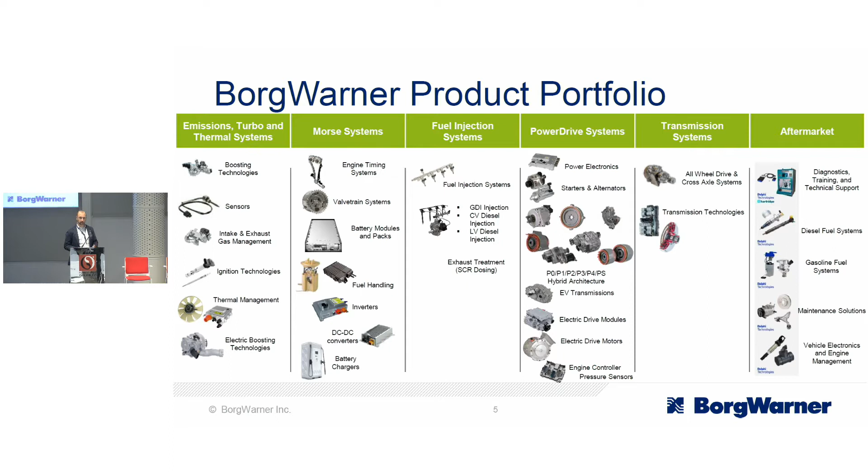This is an overview of what we are doing. Each division, as I said, is focused on a specific type of product. We belong to Morse Systems. In Morse Systems, we are mainly involved in engine timing systems, valve train, battery packs, fuel handling, inverters, DC-DC, and battery chargers. Let me give you a quick overview of my division.

We have roughly 7,000 employees, same philosophy as the BorgWarner Group, so equally divided across Europe, Asia, and North America. We have several locations, tech centers, sales, and production centers. Each of them is specifically involved in designing, developing and producing a specific product.

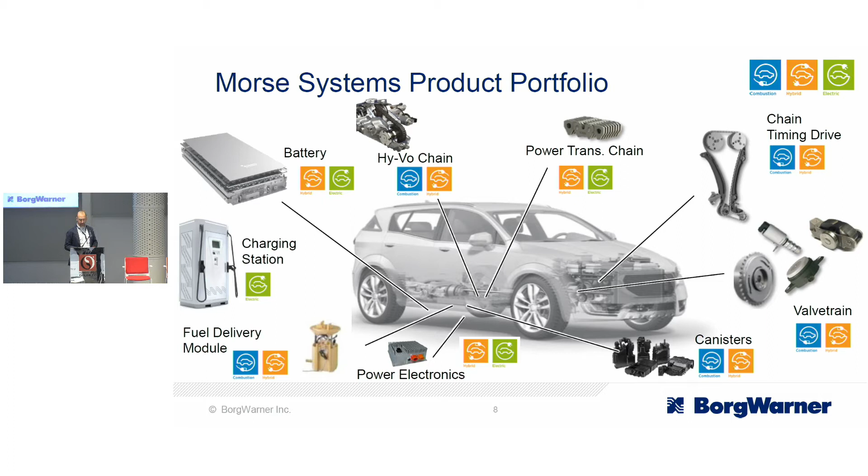This is our portfolio. As I said, and as you can see, there is the clear mission to convert more and more of our offering from a pure combustion engine market toward hybrids, and finally to the electric market. In particular, we have lately included battery packs in our portfolio through the acquisition of a big company in Germany, and we are developing our own charging stations and power electronics.

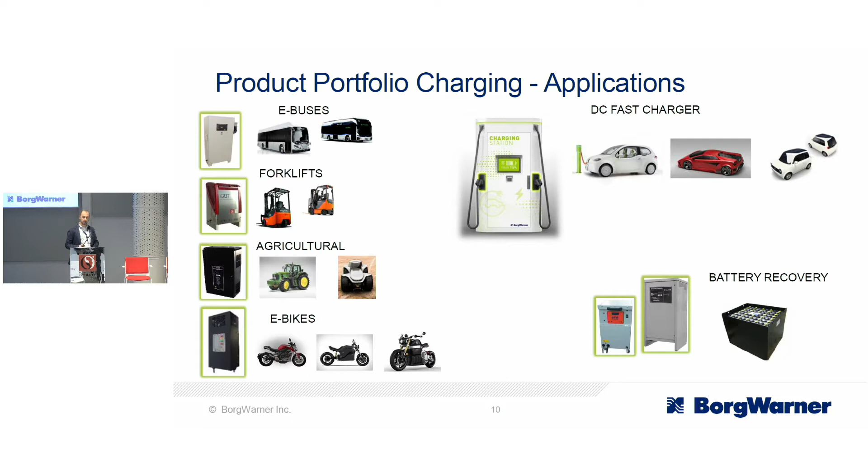Here is the overview of the plant where I'm currently sitting, that is in Lugo. We are mainly focused on producing battery chargers for every kind of application: off-highway, on-highway, low voltage market, high voltage market, and automotive. We have strong experience in battery charging because this plant was founded more than 40 years ago and started developing its first application for charging lead-acid batteries.

And we started in 2005 to develop our first application for charging lithium battery packs, following the requirements of our customers, who are asking more and more for innovative solutions. And that's why 10 years later, we developed our first battery charger specifically designed for high voltage battery packs.

Last but not least, our latest product is the automotive fast charger that we developed last year, and we have started to produce it, this one. And this is our first product that is aimed to enter the market. It can be sold almost everywhere because of its characteristics.

It inherits all the experience that we have on the battery charger side. So it's robust, it's reliable, but at the same time, it's capable of being installed in public areas, so it enables a complete portfolio of market applications. But this is the first sample of this product family. We would like to develop more and more of this type of solution, and I will explain later.

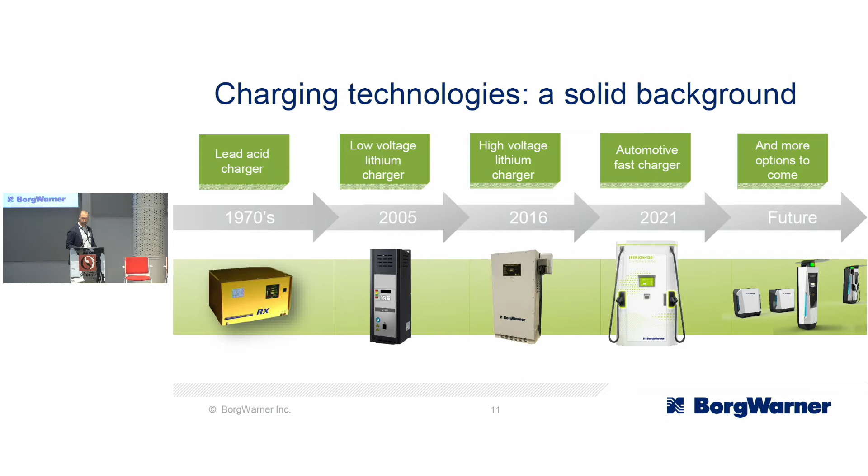Quick overview about the product. The product is a 120 kilowatt charging station that is capable of charging two vehicles in parallel at 60 kilowatts. This type of solution is interesting because it has been designed robust and reliable. It's able to charge almost any kind of vehicle application. So I'm thinking of the automotive market, passenger cars, commercial vehicles, but also all the vehicles that need to be charged, and we see more and more.

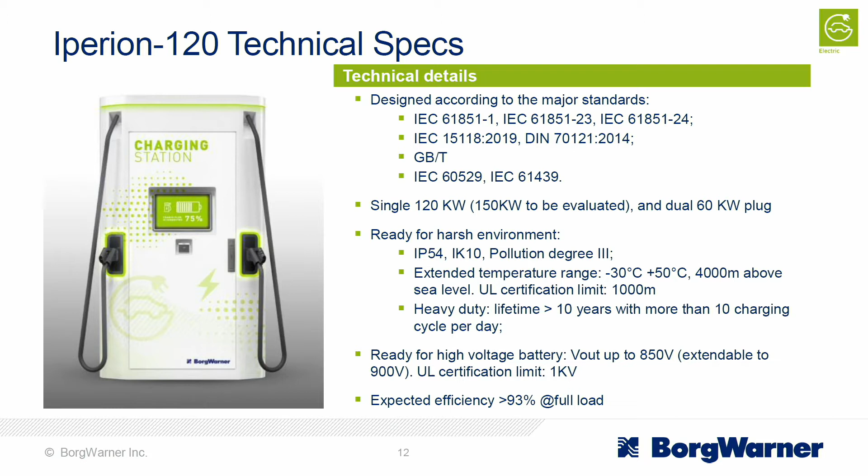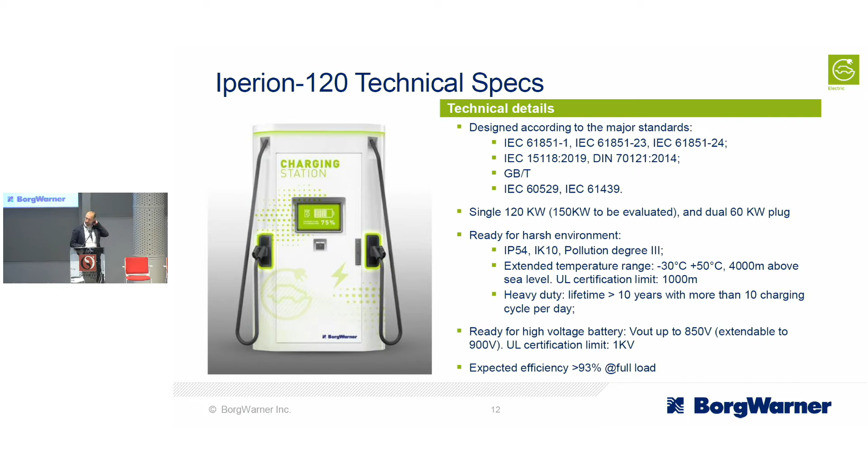I know that you are cooperating with a battery company who has developed specific custom applications for the industrial market, for example. And this type of solution can easily fit that market also. It's IP54, IK10, pollution degree 3. It's able to charge from -30 to +50, up to 4,000 meters altitude. So actually it can cover every kind of application and location.

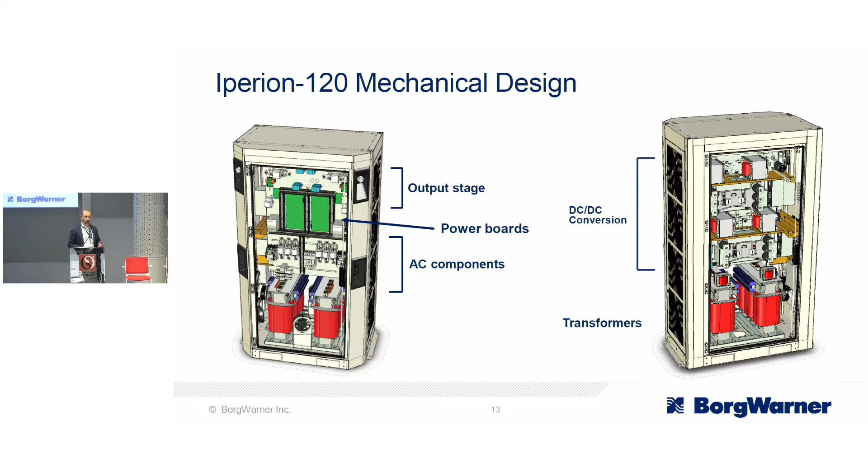Here you can see our mechanical design. As you can notice, the internal components and the internal design of our product clearly show its nature. It has been derived from an industrial concept in order to be robust and reliable. And above all, the entire bill of material and the entire design is owned by us, so it's completely built in-house. This obviously requires specific development and capabilities, and that's why we have shaped our plant to be able to embrace both the industrial market and the automotive market.

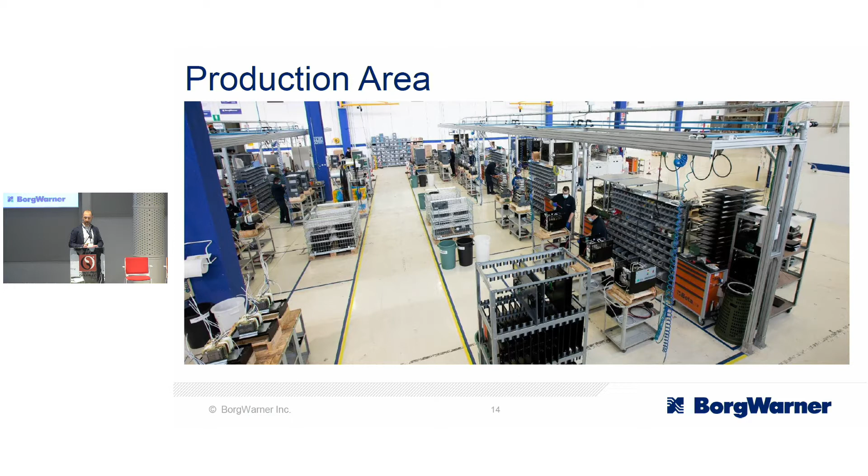As you can see, a quick picture of our production area. In this area, we are able to make the industrial market coexist, with a production of roughly 25,000 chargers per year, with the production of this type of application at a rate up to 1,000 chargers per year. So in total, we are able to embrace a big variety of different types of application. As I said, we completely own the design and the IP of this product. That's why we have our tech center, our development center in-house, which is, as you can see, very near the production area.

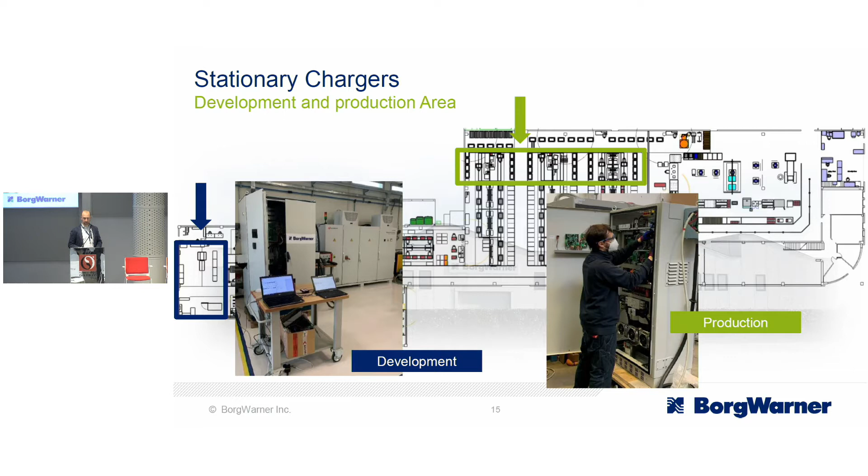And this is what we produce from the battery charger point of view. In parallel, we have a wide product range of inverters that are able to cover the low voltage market from 24 up to 96 volts, but also the high voltage market. So in this way, and thanks also to our battery pack production capability, we are able to offer a turnkey solution to our customers who are looking to integrate e-products and convert their solutions to e-mobility.

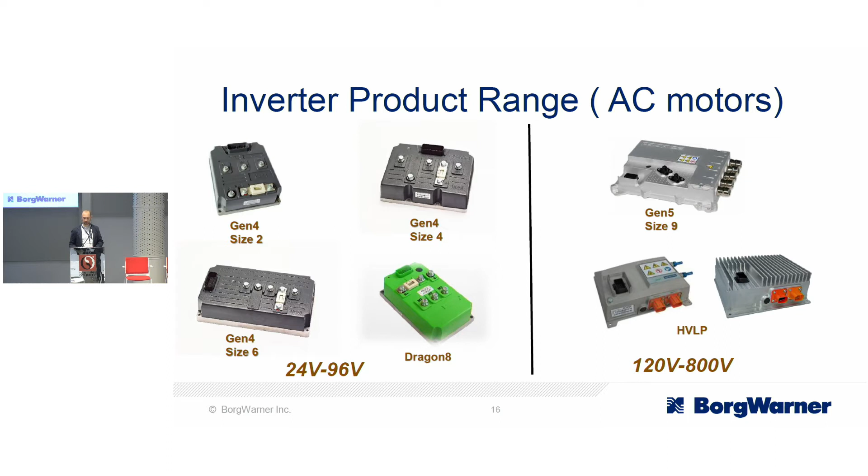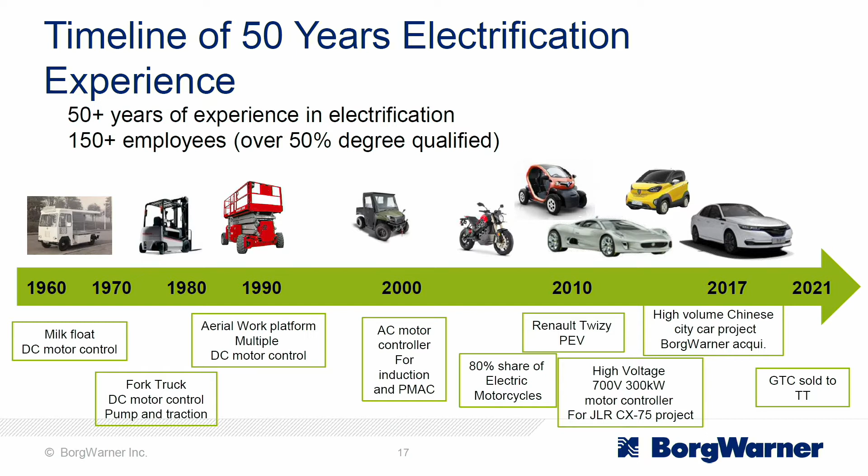The inverter product line roughly follows our experience in battery charging. We have been on the market with the Sevcon brand since 1960 with our first application, and then, following the requests of our customers, we have developed more and more solutions to support their needs. So starting from DC motor control, then followed in 2000 by our first AC motor controller with PMAC, and then more and more applications towards the automotive market with high voltage applications, like the latest one.

And again, we follow the same philosophy of completely owning the IP, the experience and the know-how to develop solutions in-house. We have our development center in the plant, which permits us to be near the customer and develop their custom installations, their custom products, in order to fulfill their needs.

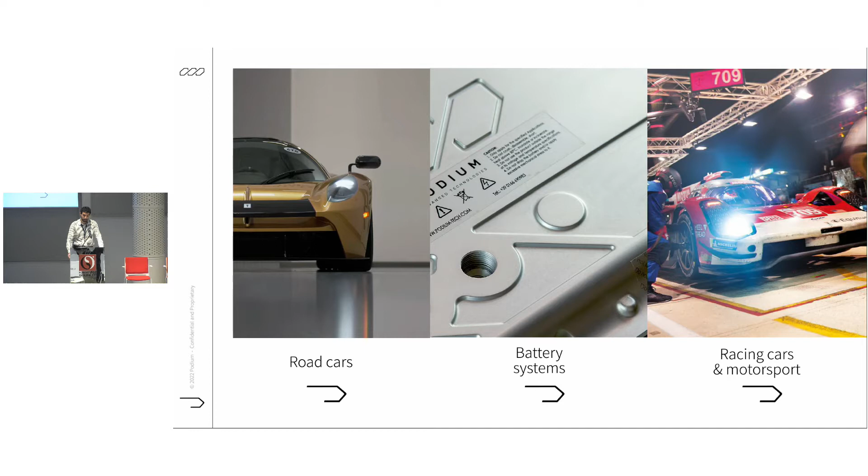So the company is divided into 3 different business units. One, road cars, automotive, for design and assembly of bespoke projects. Battery systems, for the design, according to the customer requirements, of a battery system, normally a high-performance battery system with all the electronics attached to that. And then we have also motorsport and racing cars.

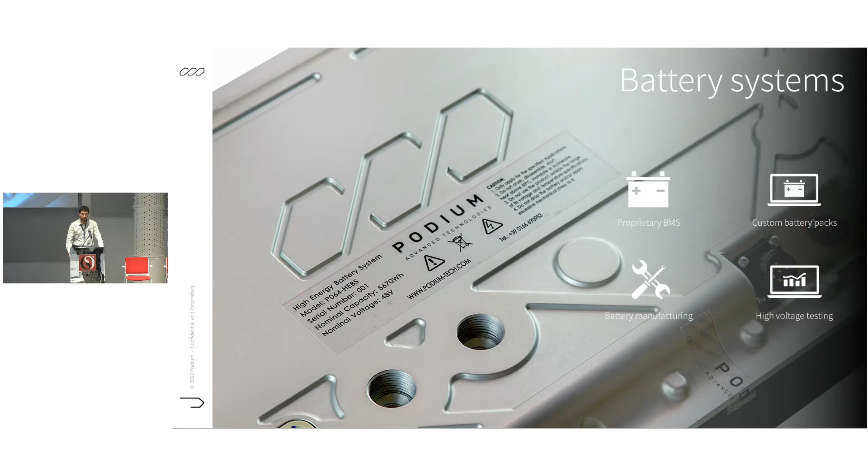Talking about the battery division, Podium has a proprietary BMS system developed in-house, with software that is completely integrated in-house, and has the possibility to develop custom battery packs, do testing, and battery manufacturing. Today we want just to bring you a little bit more insight on the steps between the requirement and the product, and how from the product we get to the selection of the process, such as laser, that is a key technology for joining.

So everything starts with testing the cells, characterizing the cells in terms of performance and in terms of the thermal characteristics they have when they work. Then all this data is used to develop the battery system in terms of module and pack, and during the design phase, the design department strictly collaborates with manufacturing engineering to understand what's the best technology for adhesive or for joining, for example, busbar to cell.

Because, as we have seen in the last 2 days, there is a strong interconnection between the product and the process. And both of them need to match each other and need to be developed together.

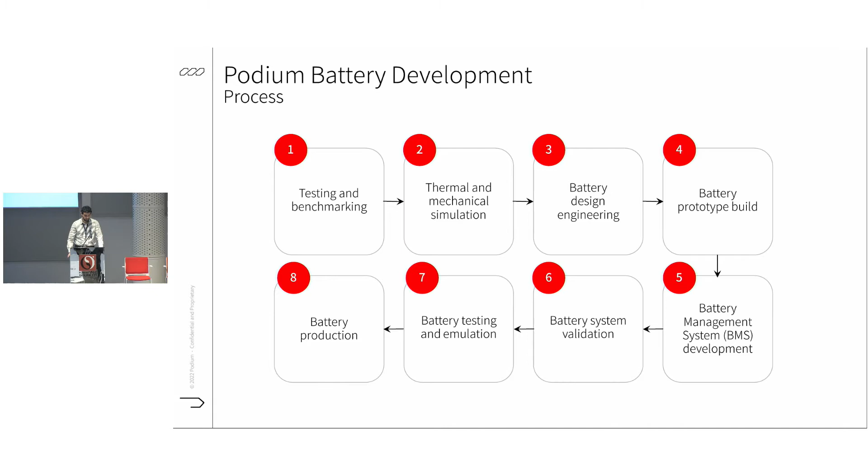Once the battery is designed, we have the first build of prototypes, and in conjunction the development of the battery management system and all the software integrated. Then the system is validated, tested, emulated, depending on the characteristics of the application. Different tests are applied, and then once the product is validated, battery production can start.

So we talked earlier on about product and process and how the two items go together. So in-house we have the possibility to do wire bonding, and it's a technology that can give some advantages, such as it doesn't require any special tooling. It gives the possibility to 100% check the quality of the connection,

but on the other side brings some disadvantages, such as thermal characteristics, heat that it generates in charge and in discharge, and different other challenges. So laser welding, on the other side, can provide probably a wider surface of connection, can accept charge and discharge cycles probably more aggressive than wire bonding, but brings some complexity in terms of process, development of the process, and tooling.

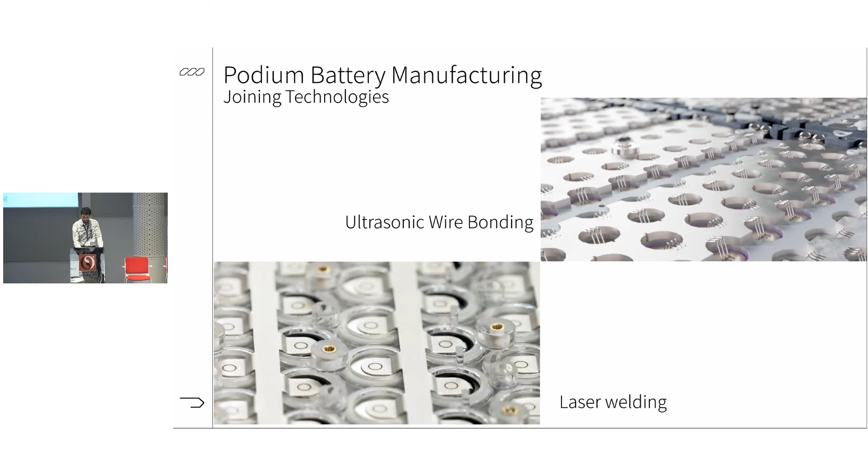So just going through one of the wire bonding applications, we recently introduced one in a very unique motorsport application with a bespoke module, with cylindrical cells, and as you can see, there is no requirement for tooling, development of tooling, and it's less sensitive to height and manufacturing tolerances. So we have bus bar material in aluminum, cell material in steel and wire material in aluminum.

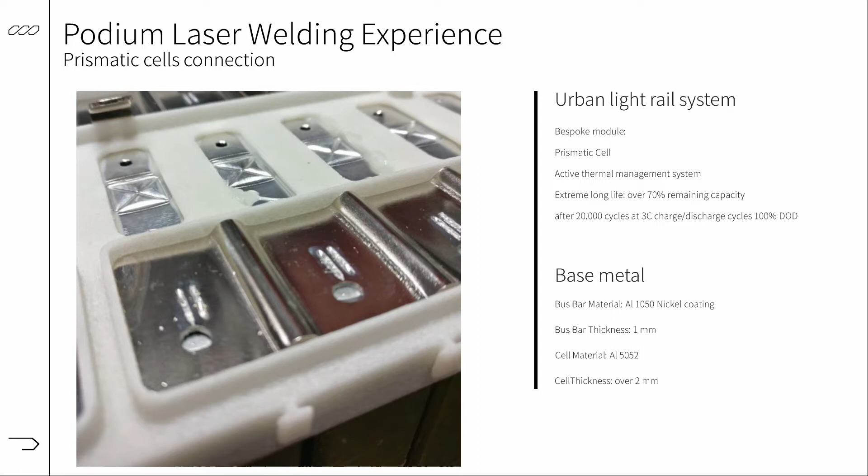When it comes to our experience in laser welding, we have had a couple of experiences in the last few years. One of them is with prismatic cells for an urban light rail system. This application has been quite challenging, mainly because the requirements of the customer had a lot of safety attached that had to be taken care of during the development of the product and the development of the process. So a lot of tests have been done,

and as we said, we had quite a strict joint specification, welding specification. So in order to test the parameters, the welding development, a lot of tests have been done in order to sense check the temperature limits, verify the welding penetration, make sure that the electrical resistance targets were within the limit, and also the mechanical requirements.

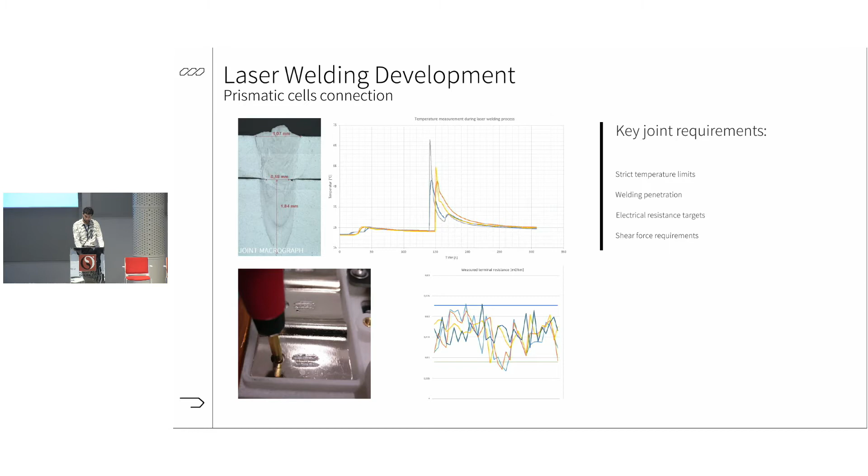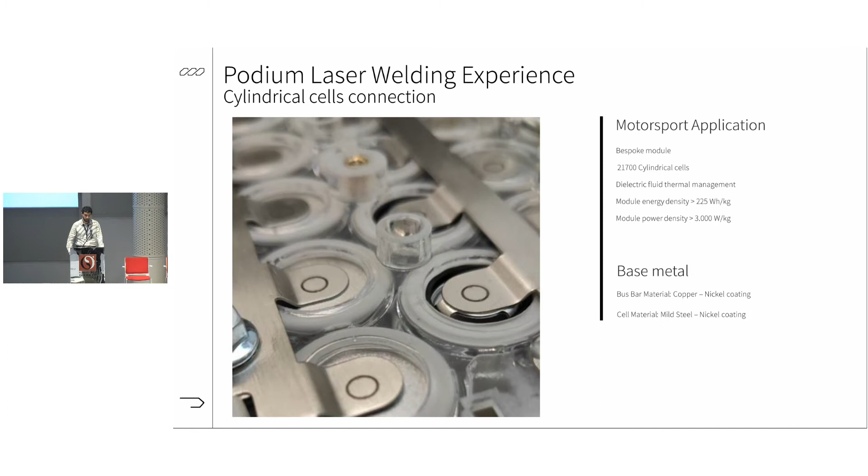Another application that has been developed recently is a motorsport application based on cylindrical cells. This application was really challenging in terms of charge and discharge rate. It was a very energy dense module with a lot of power density, and as we said earlier on, we had a process of laser welding development that has been done,

going through checking the joint macrograph, checking the weld penetration of the joint with all the challenges that the can and cap weld bring, and then strict temperature limits, being very high performance cells. This has been quite a sensitive topic. And then electrical resistance targets and mechanical requirements have been checked. And in order to validate the 360 degree weld, CT scan has been done on several samples.

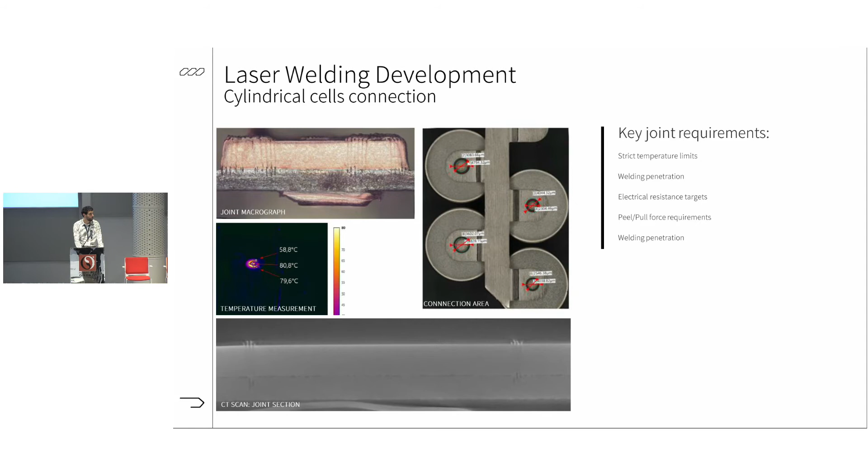So going through a typical laser welding development, starting from the development of the welding specification, we tend to select the right technology, then develop the laser welding parameters, and then do some tests just to make sure that power density and heat input are balanced. We know that with bus bar and cell connection, the trade-off between power density and heat input is really key. So it's always good to find the sweet spot and make sure that the application can work correctly.

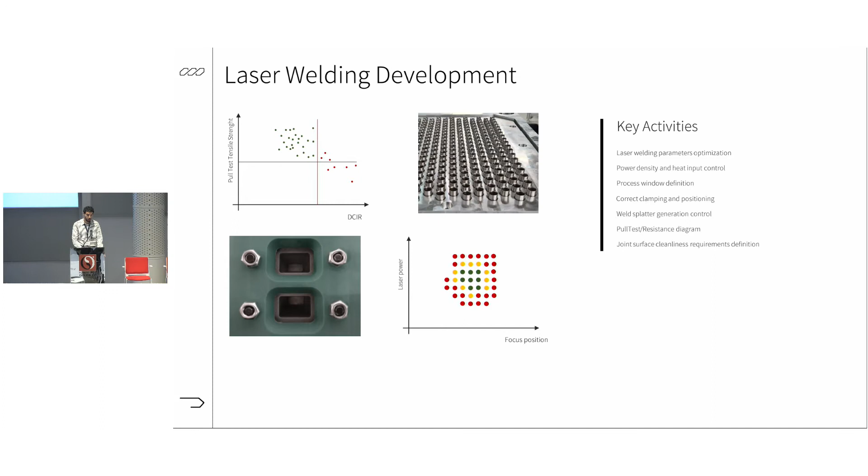So once the parameters have been developed, there is a study on process window definition, just to understand how the application and the technology can allow us to move from one position to the other within the boundaries of the limit. Then welding spatter generation, pull test, and resistance diagram, just to make sure that the two of them are interconnected in a graphic way. And then in the end, the joint surface cleanliness definition, and obviously all developed into the design of the tooling.

Our next challenge is going to be to try to scale up the production. At the moment we have a limited production in terms of numbers, but we are now moving into a new, wider facility where there will be a high level of flexible stations, allowing us to build different modules with different chemistries and different geometry forms of cells.

That will include also a laser welding system, able to allow us to have good welds on bus bar and cell, and having all integrated in our machine with a high level of flexibility. So the assembly area will be quite wide, with a volume of around 2,500 packs per year.

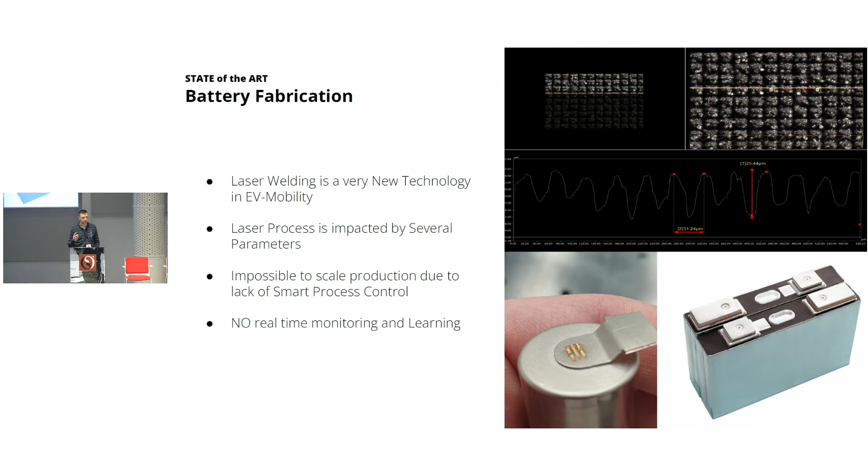We want to solve a complex problem with generative AI and cognitive manufacturing machines. We want to develop intelligent industrial machines, because to produce batteries or make functional laser structuring on surfaces is very difficult. We have a lack of skilled people to work inside the company, and we also have a lack of technology inside the actual manufacturing systems.

So let me talk about the challenges in remote welding. This is corner welding, which I use for prismatic cells. When you deploy the process the first time, you have certified materials, all the details are okay, like the position in space and the tolerances. You've checked everything on those batteries, but then production starts and the supplier sends you different materials.

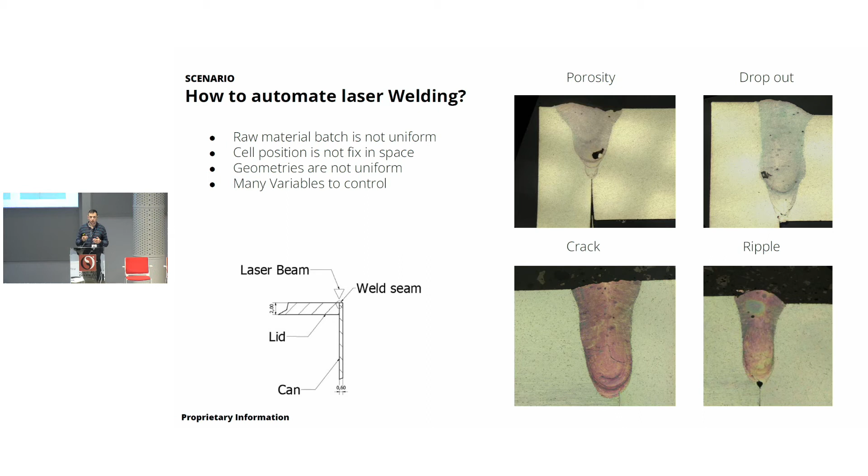The jigs used to fix the battery under the scanning head are not working well, and you get defects. You have a lot of defects you can find, and usually the system is not able to find it in time and prevent a quality drift during production.

In another case, we have a more difficult application, because fiber laser is well known to not be the best friend of copper. With copper too, in this way, you fine-tune the process at the start of production. Then someone sends you a different material, and those are the results. So you have a huge and diverse variety of defects in this case.

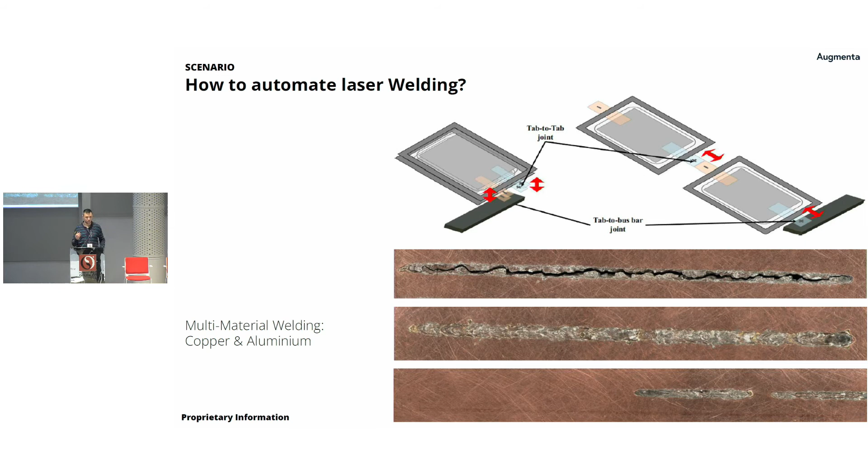Why? In this case, absorptivity is very different from aluminum to copper, and you have a narrow area where you need to work. In this area, for a standard machine, it's very difficult to work, because the effect of the material is huge. It's a very big parameter.

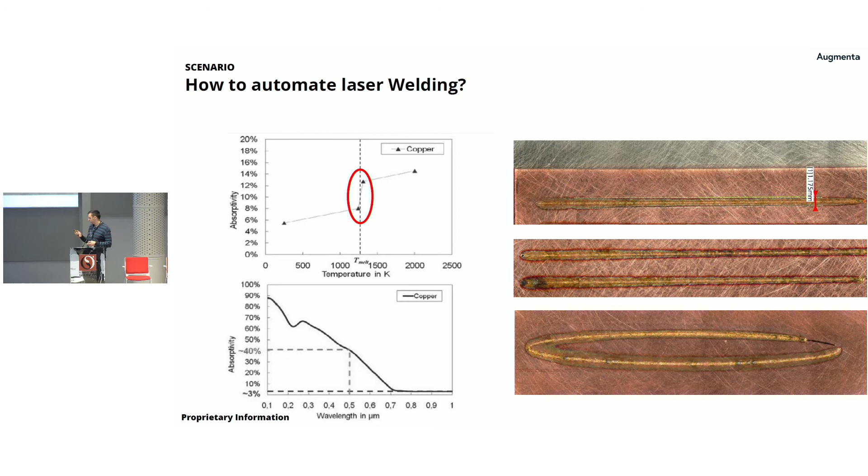So how can you scale the production, and how can you reduce the scrap material and reduce also the rework time for that? It's the nature of the welding process. If we're talking about welding, you have a huge parameter that lives with you during processing time, and it's like driving a shuttle—you need very skilled people to manage the manufacturing process, and today you cannot find that.

And if you want to send a machine to South Africa or Congo or China, before sending the actual machines, you need to find the people there, or send your own technician, but maybe the family is not happy with that. So what can we do?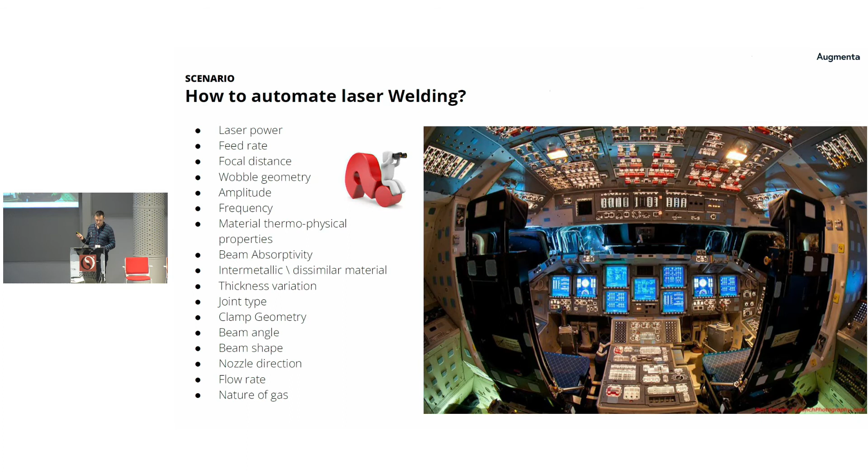As Augmenta, we develop this technology and apply it on different sectors. It's an FPGA controller that gathers data from the field using different sensing technologies, drives the robotic work cell, or interacts with the operator with a smart HMI. But in the back, we have an artificial neural network trained for that particular process. And it's not only a black box, but a physical-based model, like a surrogate model, that works.

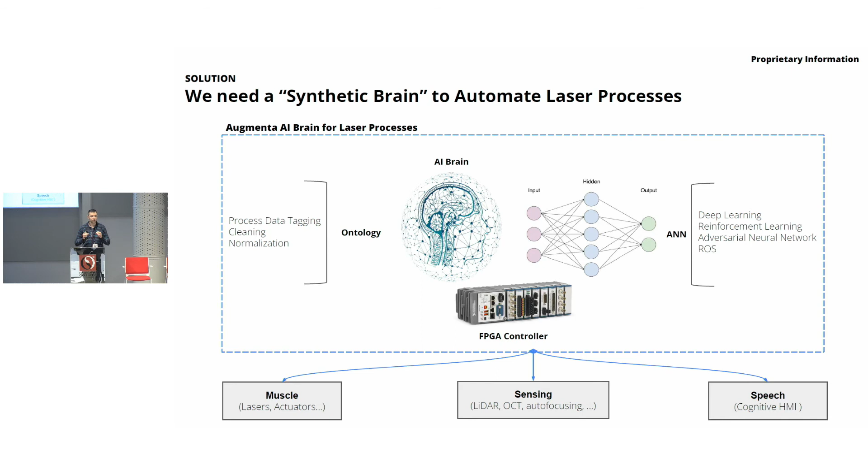In every welding operation you make, it takes and collects data, every day. But first of all, you need to get data from the field. For example, to have every time the right distance between the f-theta lens or the surface of your head to the piece, you need to make a measurement.

Or if you want to make a correct path planning of your welding seam, you need to know where the batteries are. Or you want to see what is going on during the welding, to see the depth, the width, if you have splattering, and so on.

Then you need to train a machine learning model. Machine learning model means that before starting production, you run some tests and define the curves of your working process, and with that the machine can adjust itself by changing some parameters. Here we have line energy versus the focal distance to the piece. So with only 2 parameters we can define something about the process.

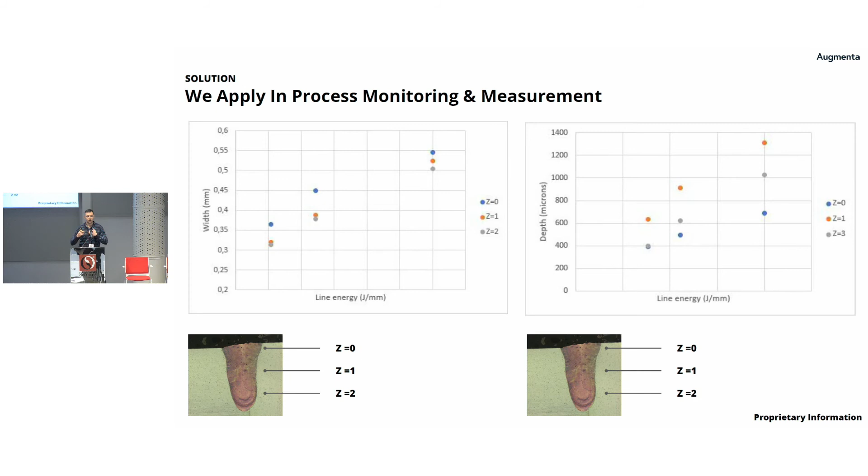And while the machine is welding, the system adjusts itself. So you don't need to adjust and trigger something because you have made something wrong. In time, the machine is adjusting itself.

Then we were talking about the sensing technology to define where the battery is. So here's an example: with our generative design software, you make a full point cloud analysis of the batteries before starting to weld. You define all the paths on the real battery, not on the CAD model, and with that you can start the production. So every path is different from the other, and every time you make this new analysis and define a new strategy. In this way you can control everything about the geometrical aspect of the welding.

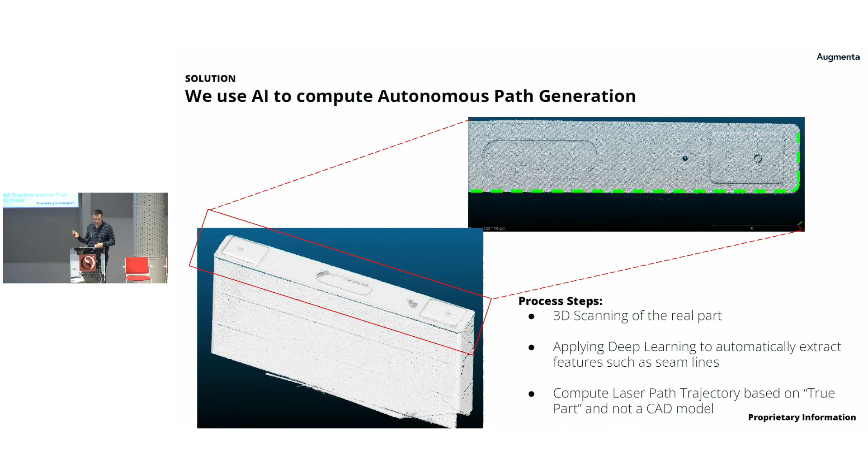After that, you have defined where the laser goes, but you have to define which parameters of the laser. So here comes what you have done before to train the model. You make some offline analysis, several tests, cuts, and define which kind of defects there are and suggest the ontology for that.

And on the other side, you have installed some sensors that give you some graphs. And with your analytical model, you define what is going on between them. Then the neural network or the reinforcement learning process starts to work, and the results tune the process parameters. And with that, you have the new recipe for the next welding, which makes this another test.

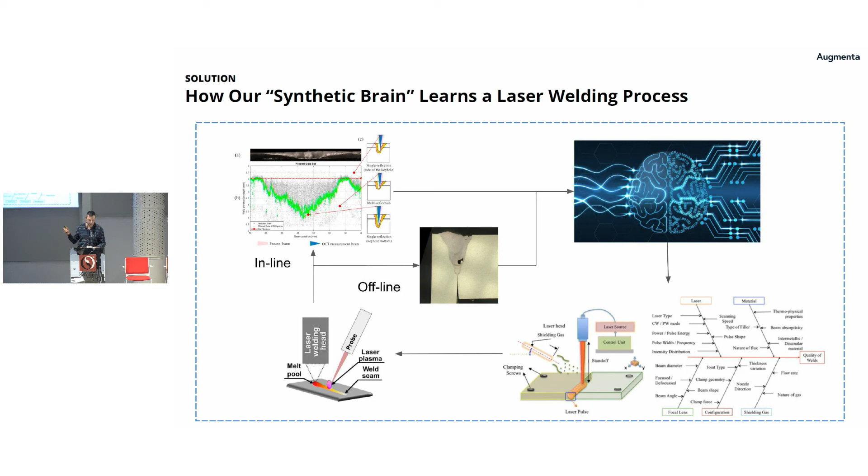Obviously, not every time do you make offline analysis. We are developing and currently deploying our system based in Piacenza, thanks to Lumentum and Raylase. And on that, we are making some experience, and we are currently making some trials for customers to see how the throughput of the production can be with our systems.

And we have a scientific environment in Piacenza, so we can easily find and see what is going on in a metallurgic way on the material, and then come back to the customer and say, okay, guys, this is your maximum speed, this is the maximum quality, and this is what we expect to give you.

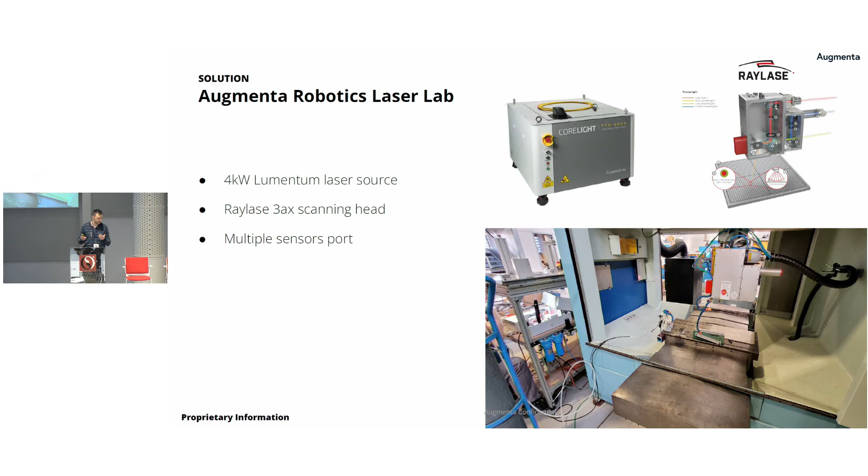For the production plant, we have also developed a smart HMI. This smart HMI helps to sell your machine where you haven't any skilled people. So it's not like an iPhone, but it's very easy to use.

You have a real digital twin environment that is working, so you can easily see where your robot is, what your surfaces are, what are the suggested parameters that come from this artificial intelligence. These digital operators help the operator select and drive the process before starting. So it's a full digital environment because before going to the machine, you can see what happened in production.

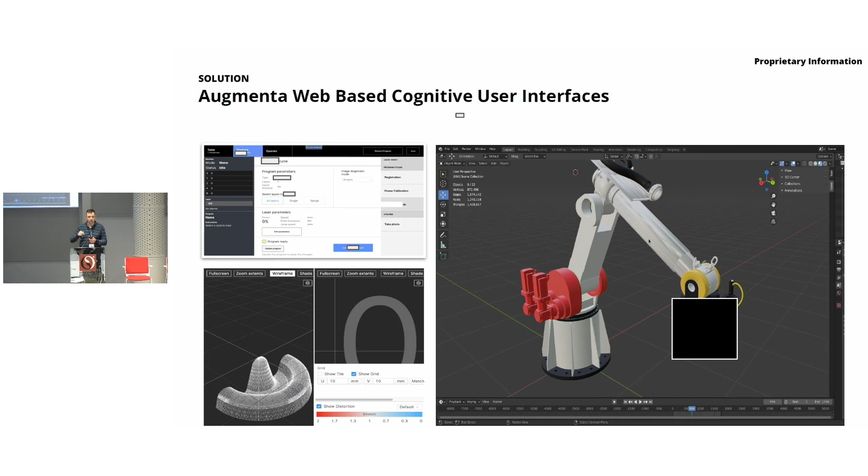For example, if we are talking about a robot, we need not to collide with the pieces, or we need to know which is the best strategy to approach the pieces. Today, we develop different applications with our technology.

Everything except the Breton machine are visible in our lab in Piacenza. For example, if we are talking about cutting and structuring, we use a picosecond laser source and the scanning head, and with this FPGA, we are controlling every time the correct process.

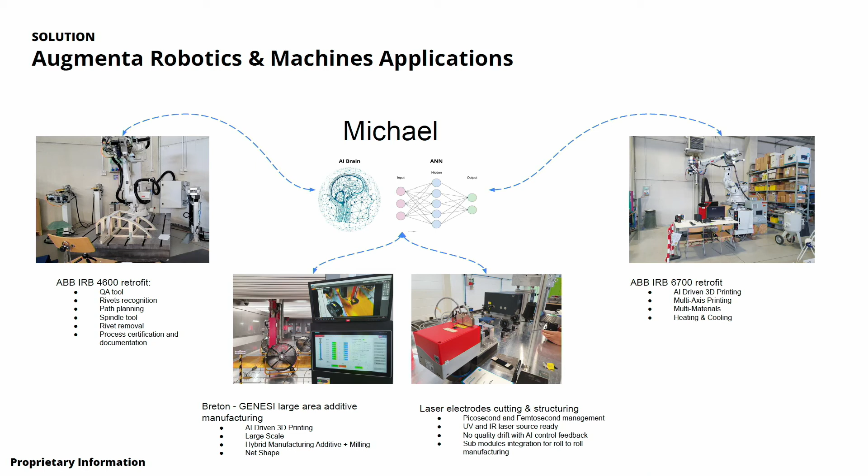Then another application, just for your information: we deployed and retrofit an ABB robot to make a big 3D printer. On this bench machine, we study and develop the process and the recipes for the machine learning model that comes on the Breton machine. The Breton machine is a very huge 3D printer machine.

It is 12 meters long, 4 wide, and 2.5 tall, and that machine runs on artificial intelligence. So the operator doesn't need to know almost anything about what polymer is used, and the machine selects automatically all the parameters, such as the screw speed, temperature of the extruder, and so on.

Another nice thing is the robot that, on aircraft surfaces, sees where the rivets are with a combined vision system using a camera and a profilometer. Then on this point cloud, it defines the whole direction, changes the tool, takes the spindle, winds the spindle, and removes all the rivets.

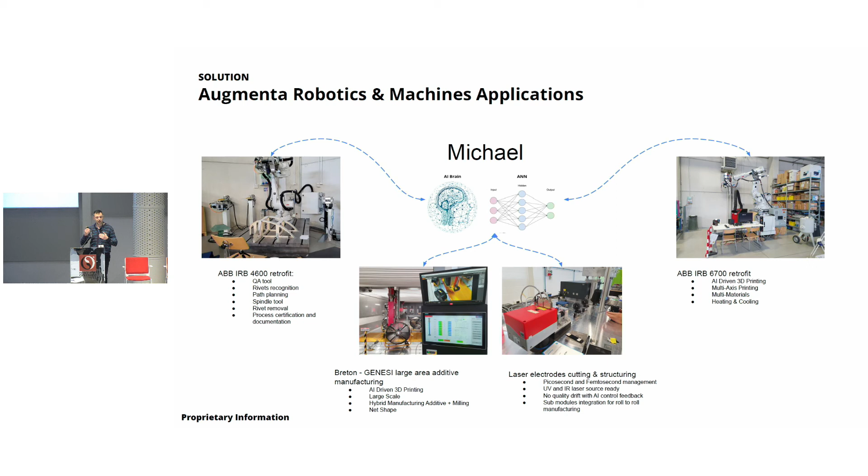This proof of concept—cutting, printing, and rivet removal—are POCs developed inside Augmenta Lab, and then put into production at scale afterward.

So, a scenario: you have a machine driven by artificial intelligence. On the other hand, you have this kind of generative design that allows you to find design alternatives you'd never think of on your own, and it suggests, for example, if we're talking about a supercapacitor, what's the best recipe. I don't know, but there is artificial intelligence working for you, and it comes to you with several multiple solutions, and then you can choose. I think that's the best way to choose instead of design.

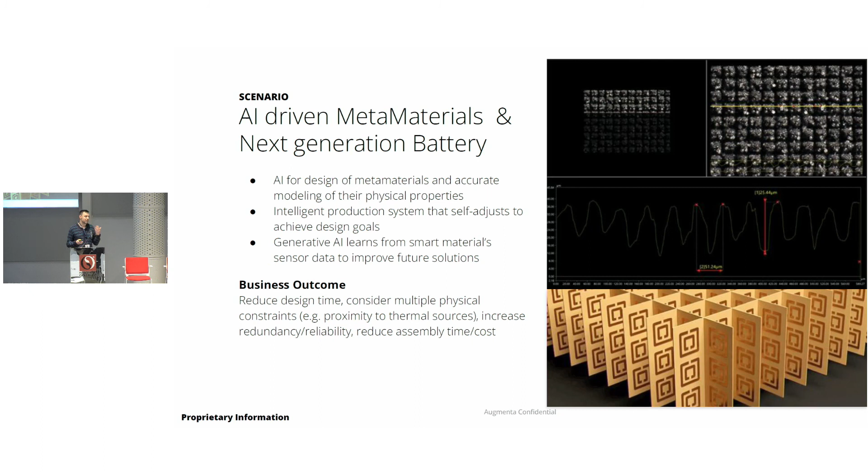The same applies to the next generation of batteries. We have an interesting case study over there, but I need an NDA signed before talking about that.

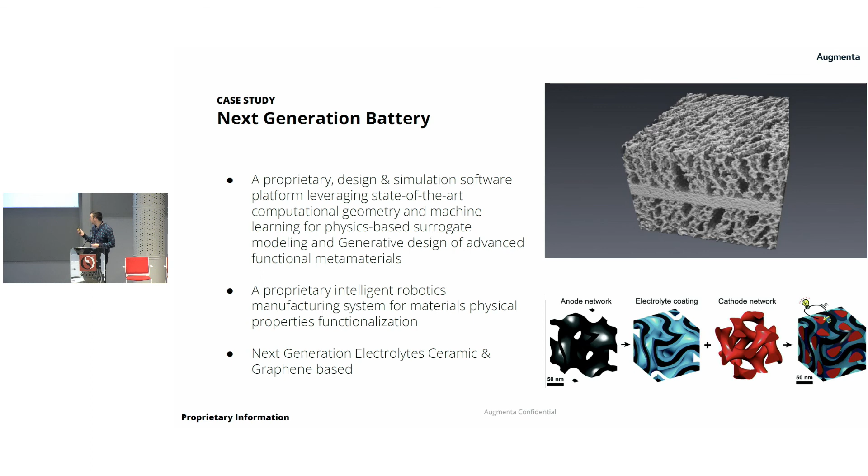So here we are, what is Augmenta? In Toronto, where our headquarters is, they are working on digital construction—generative design for construction. So a software that designs where the pipes must go inside the building, for example to reduce the cost or maximize the maintenance.

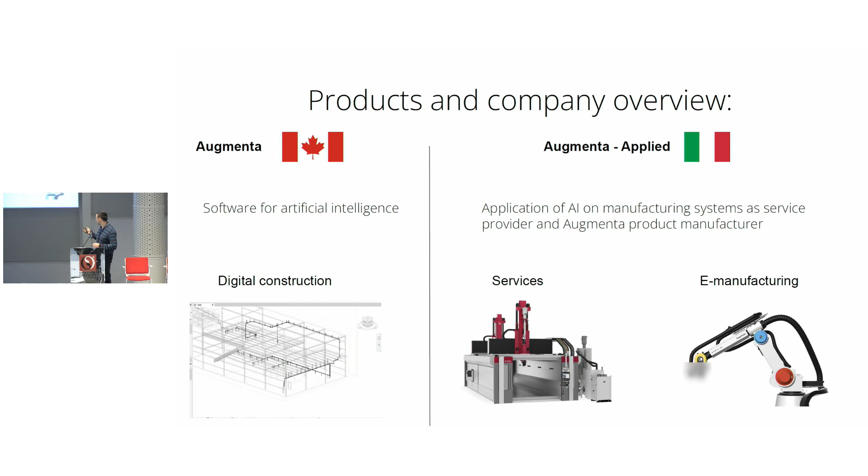In Piacenza, we are developing services like the Breton machine, that is this one, or we are making our own products. Here is the leadership team of Augmenta. It's important because the main founders are: one is Francesco Iorio, the father of generative design, and the other one, Max Moruzzi, has scaled fiber placement for the aerospace sector. This is what the team made before creating Augmenta.

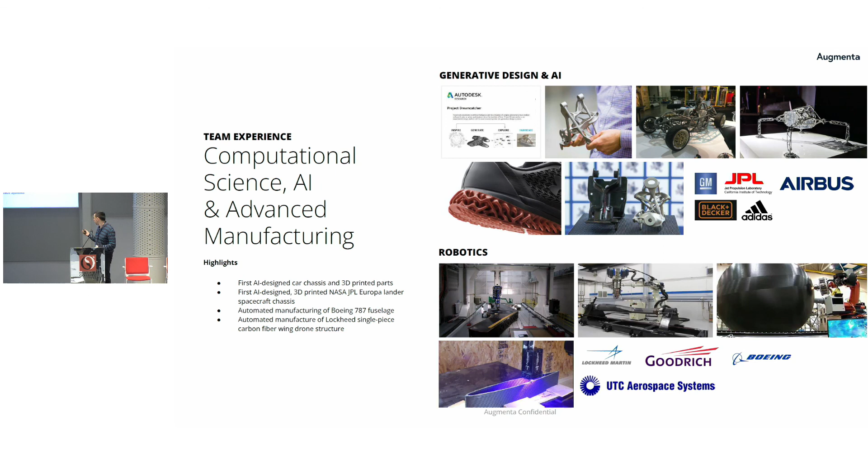So on one side, for generative design, Francesco designed the way the computer designed the frame of the car. This was the first car designed totally by artificial intelligence—no one drew a single line there. Then with additive manufacturing, they realized the famous GM seat bracket. On the other hand, we have strong expertise in fiber placement, made for the biggest company based in the US. So this is Augmenta.

This is our Maxwell robot that has 10 microns of accuracy, our laser-based reference robot, and we are deploying and putting it into production in several companies. Okay, we are here. Thank you, guys.

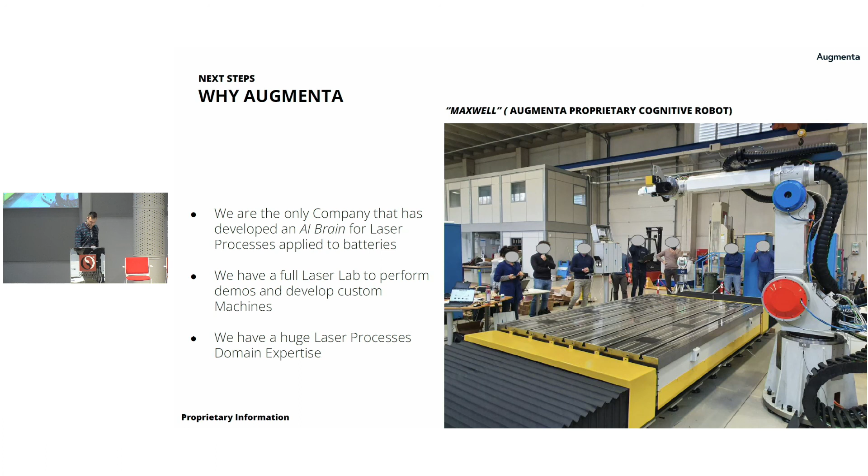Great, thank you Andrea, very nice presentation, very interesting, it throws us into the future, this presentation. Any questions? Any curiosities? Antonio.

Thank you very much for the presentation. Just a curiosity, I see in the last slides graphene—which could be the role of graphene for new battery or energy storage? Sorry, can you rephrase? I saw in the last slide graphene. Okay, for the battery—which could be the perspectives to use graphene for energy storage or batteries?

I think we need a special call for that, because it was our scenario one year ago, to put graphene on batteries. Then a company asked us to do some activities there. So I don't want to disclose anything, but we can easily set a meeting and maybe go deeper into details for that.

Any other questions, comments? Neither at home. So thank you again. Thank you, Davide—Andrea, sorry.